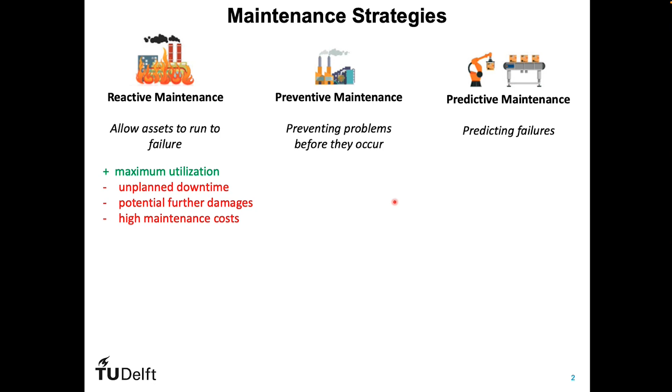For example, with reactive maintenance, the advantage is the maximum utilization of the asset. But we have many unplanned downtime periods, potential further damages, further damage to other assets as a domino effect of one damage, and of course, high maintenance cost. On the other hand, with preventive maintenance, we have less unplanned downtime, we have increased planned downtime, and we are also doing maintenance of seemingly perfect assets. So we are wasting some remaining useful life of these assets.

Last but not least, we have predictive maintenance, since we are predicting failures, and the main advantage is that we have a holistic view of the asset health. And the main idea is to take the right decision at the right moment. Of course, there is some complexity in that kind of strategy. But our role as academics, as engineers, is somehow to reduce this complexity, to make it easier for people to use this predictive maintenance strategy and implement it in real case studies, in the industry.

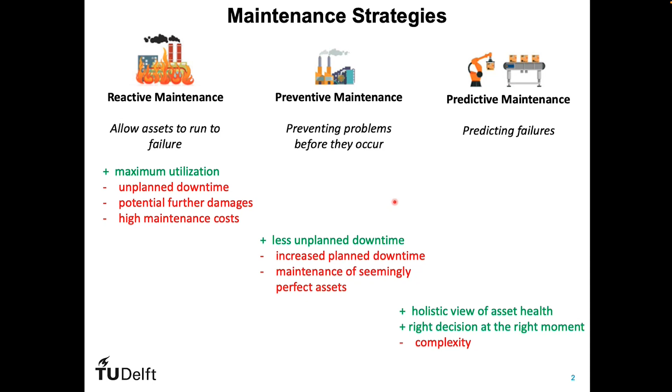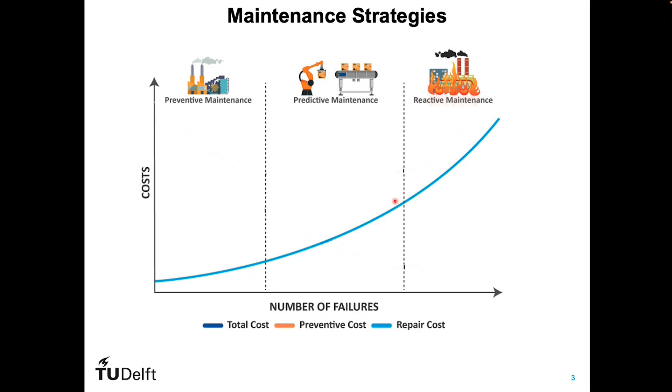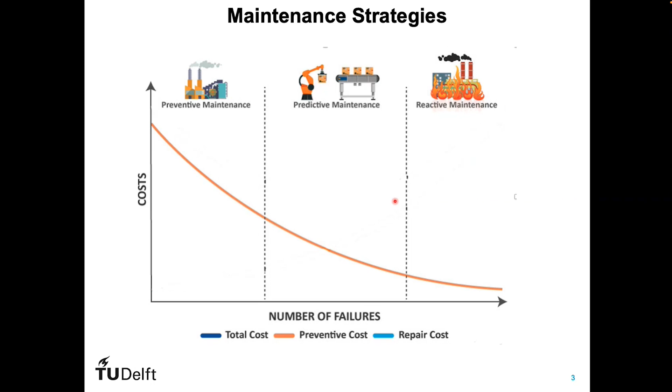So let's discuss a bit about the cost. If we discuss the repair cost, of course, in preventive maintenance the repair cost is really low, and in reactive maintenance the repair cost is really high. On the other hand, the preventive cost is totally different. The preventive cost in preventive maintenance is really high, and in reactive maintenance it is really low. So as you can understand, since we would like to take decisions towards minimizing the cost, the optimum cost falls into the category of predictive maintenance.

So in terms of cost, of course, predictive maintenance is the right decision, but also in terms of reliability. For me, okay, I know that it could be fun sometimes to not really know what the future will bring, or what's going to happen. But in my opinion, in such cases, that's not true. So we need to know. We also have the tools to make decisions about the future.

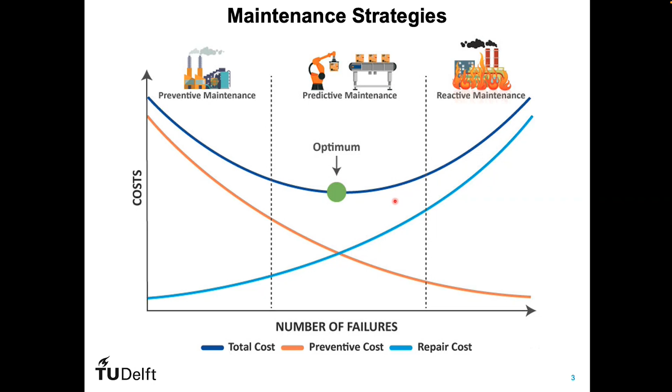And let's move on now to the predictive maintenance strategy, because based on all the aforementioned, we understood that this is the strategy that we have to follow for the maintenance planning. Predictive maintenance is a maintenance strategy that uses data and machine learning algorithms to predict when an asset will fail, so to predict the remaining useful life of an asset, so maintenance can be performed before the failure occurs.

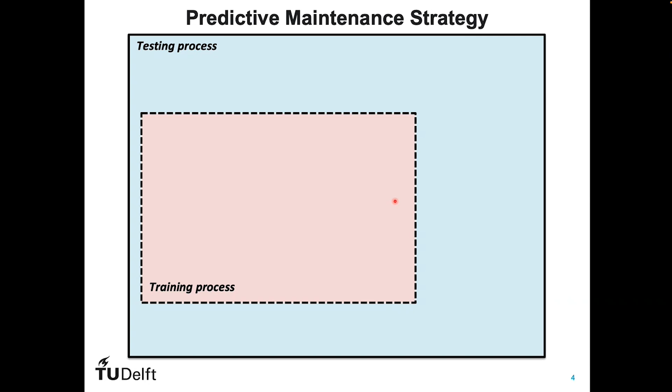Of course, this strategy involves collecting data from the assets and other sources, analyzing the data using machine learning algorithms, and using the results to make maintenance decisions. This strategy mainly consists of two processes, the training process and the testing process. In the training process, we gather all the available information that we have about this asset, some training data. We also have to choose how we will model the degradation process of this asset. And the outcome is to estimate some parameters.

Then, going to the testing process, we have our testing asset. We are extracting some data from this asset. We are doing some kind of feature extraction. We develop some monitoring data, some health indicators, and afterwards, using these health indicators and the estimated parameters, we are able to do some diagnosis. With the term diagnosis, I mean to predict the current damage state of the asset, and later on to move towards prognostics. And having prognostics, we can go towards decision making.

So as you can understand, prognostics is the essential element of this predictive maintenance strategy, since it's the only element that provides the needed information about the future. It's the only element that can quantify the remaining useful life. Of course, diagnostics is important, since via diagnostics we are able to know the current damage state, but the insight towards time, which is a really important parameter for a maintenance strategy, comes only via prognostics.

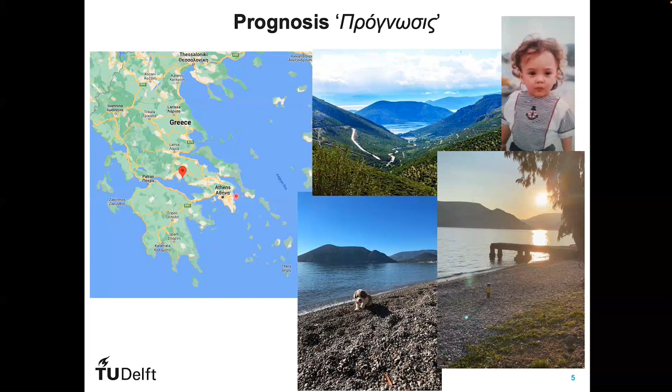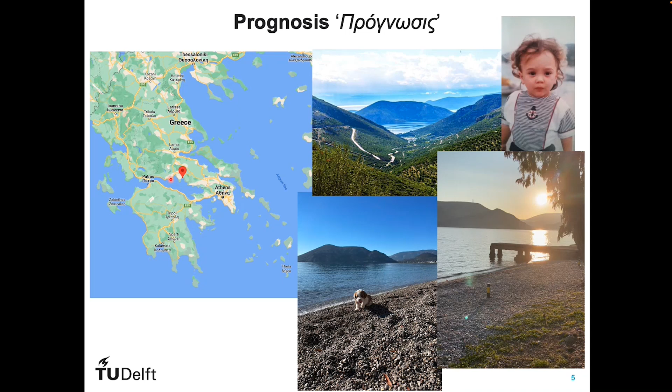So let's now talk a bit more about prognostics. Let's go back into history. At least the first step will not be really back into history. And this is me. As you have understood, I'm Greek. I grew up in a place called Aspra Spitia, which means in English white houses. This place is over here, really close to Athens, let's say. It was quite common every weekend or every second weekend to have walks with my parents and visit other places close by. One place really close to my hometown is Delphi.

I don't know if you are familiar with this place, but between the 7th and the 4th century BC, people from all over the known world would visit the temple of Apollo in Delphi to consult Pythia for personal matters. Pythia was the name of the high priestess of the temple of Apollo. Pythia was widely credited for her prophecies, under divine possession by Apollo. And her oracle powers appeared to be associated with vapors, probably ethylene gas.

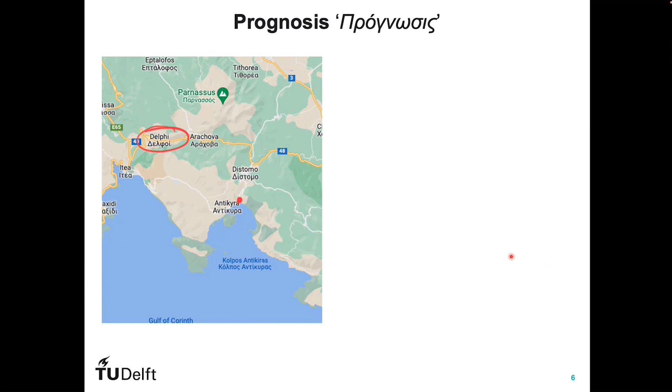As you can see, this place is really close to my hometown, so I used to go there quite often. And as a child, I was always really interested in how this was possible. How is it possible to make predictions about the future? How is it possible to know the future? And this is my first way of learning and thinking about prognostics. But let's go now back into science.

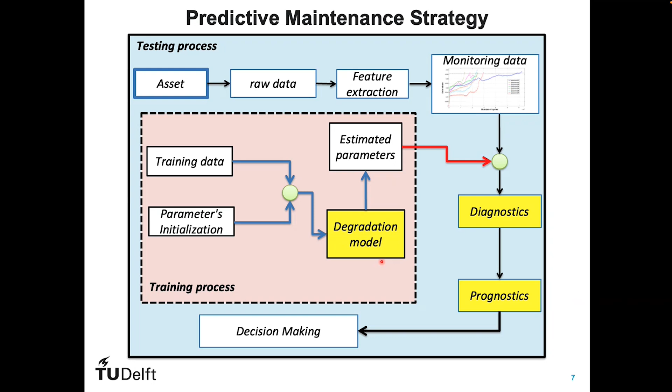In the next slides, I'm going to discuss a bit more the selected degradation model that I'm using in most of my case studies, and I will also define the meaning of diagnostics and the meaning of prognostics. In most of the case studies, I'm using Markov models. A Markov model is a stochastic model that describes a sequence of possible events. Markov models are mostly called state space models and can be characterized as clustering models. The idea is to define some damage states. In this illustration, we have 4 damage states.

And the idea is to model the degradation process of this asset. In order to model this degradation process, we can model it via some sojourn times for each damage state, so to know how many time units the asset will remain in one damage state, and also create connections with the next damage states. The sojourn times can be geometric or exponential, depending on whether we have a discrete domain or a continuous domain. But if we would like to extend that, we can use semi-Markov models.

With semi-Markov models, we can model the sojourn time with any kind of distribution, parametric, non-parametric. We're also going to move into hidden semi-Markov models. Hidden, because the observations that we are extracting from this asset are not directly connected with the damage state. For example, imagine that we have an engineering system and we are extracting different kinds of data from this system: acceleration data, thermal data, any kind of data. Of course, this data includes some information about the damage state, but this information is not direct, that having these measurements means that we have this damage. So we need to model this connection, this hidden connection. And this hidden connection with hidden semi-Markov models can be modeled via these emission matrices, these beta parameters.

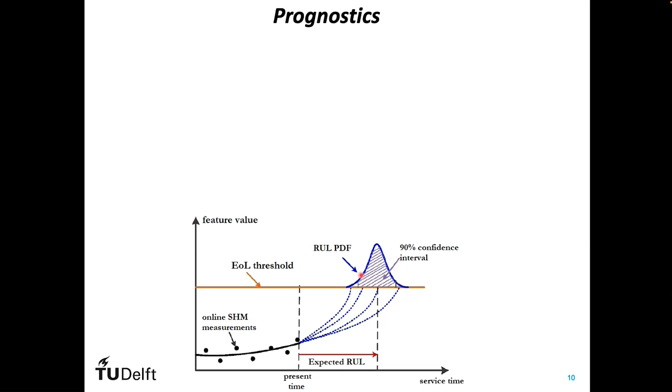And let's also give a mathematical definition of the reliability. So what is the reliability? It's the probability that the asset will be alive at the time point t, conditional to the available data that I have till that moment, which is the time point tp, given the fact that my system hasn't failed yet, and given the estimated parameters that we have already calculated in the training process.

So let's discuss a bit more about the prognostics. What we can have as an output in terms of prognostics: let's assume that we start our experiment, we have our asset, and after 155 hours, using all the available data and the estimated parameters, we can predict the remaining useful life. And as I have already mentioned, the remaining useful life is a random variable, so we can predict the mean value. This red line is the mean value of the remaining useful life, and also some confidence intervals. Here we have, let's say, the 90% confidence intervals.

And later on, when the system finally fails, and this asset fails after 210 hours, only at that moment will we be able to plot the actual RUL. And this line consists of 2 points. What this line tells us is that after 210 hours, the remaining useful life of this asset is 0. And of course, at the 0 time point, the remaining useful life is 210 hours. But once again, this line is known only in the end.

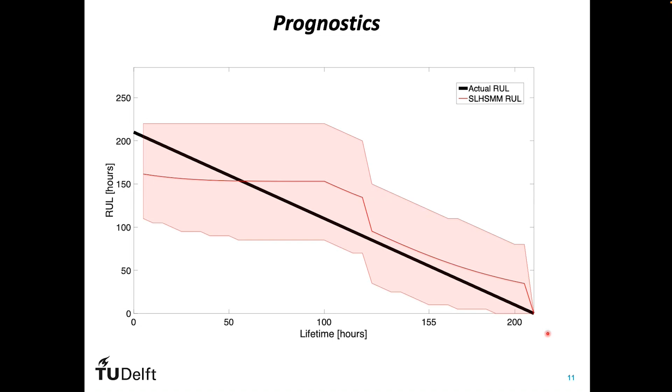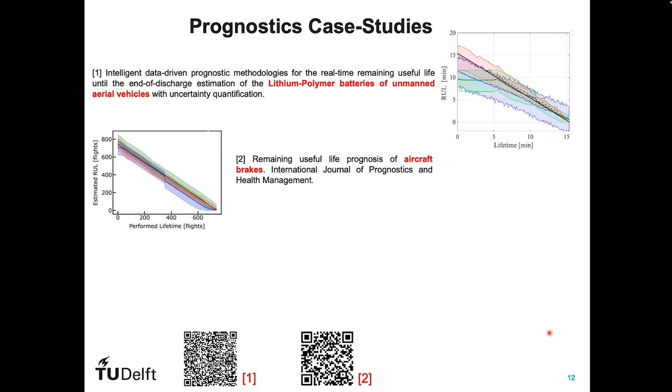So we have used these kinds of methodologies for many different case studies, let's say for lithium polymer batteries, for unmanned aerial vehicles, also for aircraft brakes in collaboration with KLM. I have also used that for compressors. But now let's move towards one specific case study, and this case study is about prognostics of composites. As you probably know, high-performance composite materials like carbon fiber reinforced polymers are used in primary structures of aircraft nowadays, like the Airbus A350 and the Boeing Dreamliner.

So, of course, there are many advantages regarding this kind of materials. First, these materials are lightweighted. Composite materials can be lighter than traditional kind of materials.

Also, they have high strength to weight ratios. They have really high durability, so they're often highly resistant to corrosion and damage. Of course, we have flexibility in terms of design and tailored properties, such as high electrical conductivity and thermal resistance.

But of course, there are some disadvantages. The heterogeneity that exists in composite materials, the anisotropy, the interfacial effects of these two materials, and the complex manufacturing process make these materials a really complex engineering system. To be honest, based on my experience till now, composites for me are the most complex engineering system that I have faced.

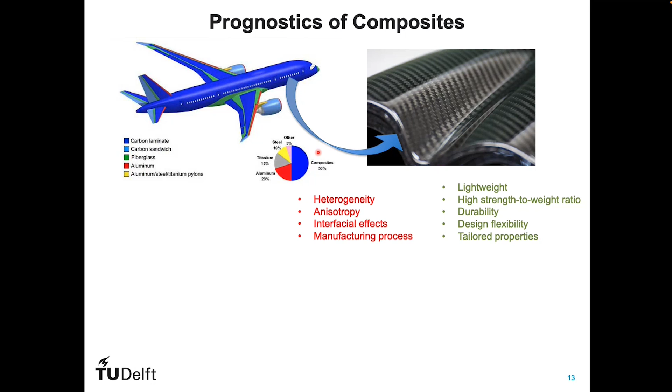So I tried to do prognosis for composites, and how we did that - we just took some rectangular composite specimens with this kind of dimension.

And we had some loading conditions, like fatigue loading conditions. This is just the loading conditions that we applied. And we had 8 specimens, 8 CFRP open hole specimens.

These specimens are manufactured exactly the same way, from the same material. The operational conditions were exactly the same, so same loading conditions. But still, if you observe the lifetime of these 8 specimens, we have a high variance.

Specimen 1 failed after 22 hours, specimen 2 after 16 hours. If we manage to identify the outliers of the training, I think it's specimen 4 that failed after 13.6 hours. And the other outlier is specimen 8 that failed after 30 hours. So we can see a high variance in terms of lifetime.

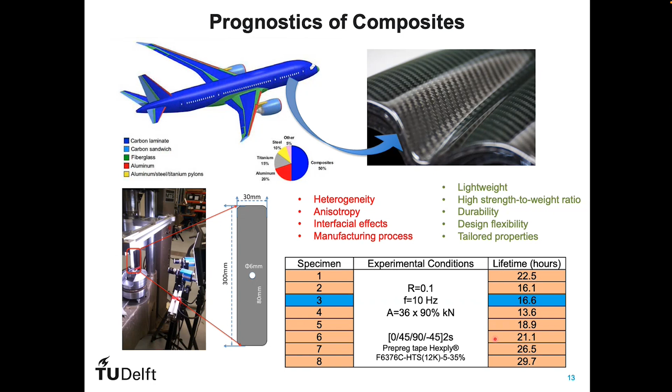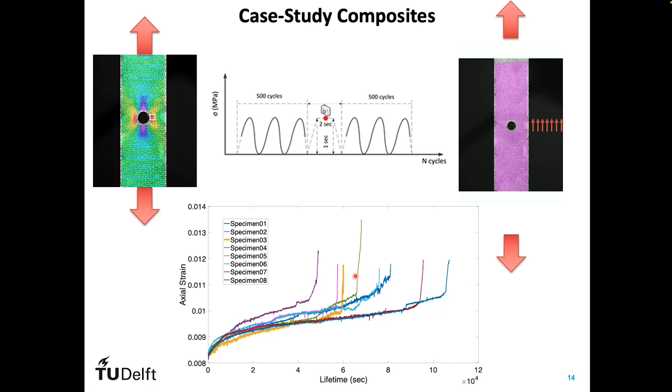But my question is, what is going to happen if we have some unexpected phenomena only during the testing process? The training process has already happened - we have the data, we trained the model - but in our online system, in our online asset, we have some unexpected events.

For composite structures, in terms of aviation, imagine that this unexpected phenomenon could be a bird strike, and we simulate that via online impacts using a gas gun.

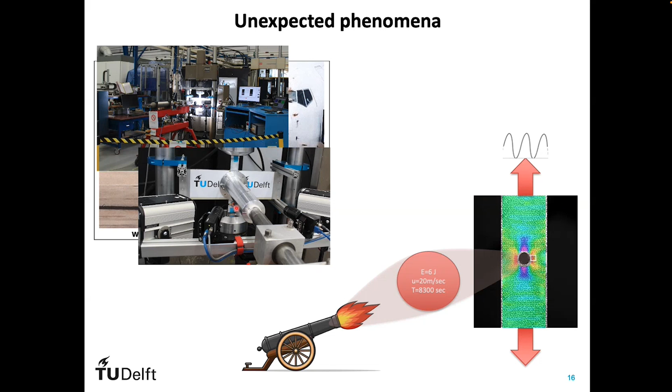So during the fatigue loading, we just took one gas gun and went directly to the composite specimen, and we had some impacts. We can also have unexpected phenomena in terms of the manufacturing process.

To be honest, I didn't do that on purpose, but during the drilling process, the quality wasn't the same. As you can see, the drilling process here has different quality than the training data.

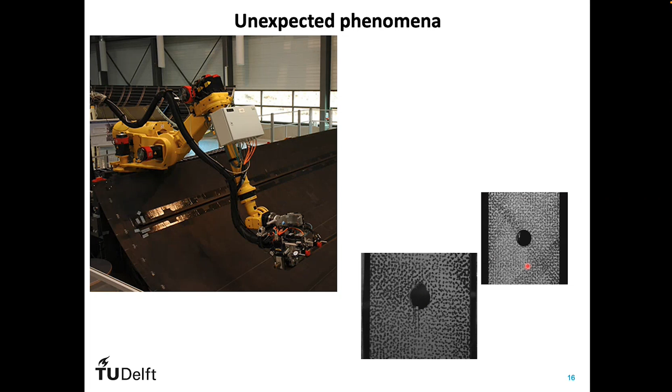And then we did exactly the same feature extraction process. So we have these two new specimens, and these specimens include now some unexpected event. As we can see, the specimen with fatigue and impact failed after 10.5 hours, and the specimen with the manufacturing defect failed after 4.2 hours.

So these are kind of outliers, because in our training process, the minimum lifetime that we observed was just 13 hours.

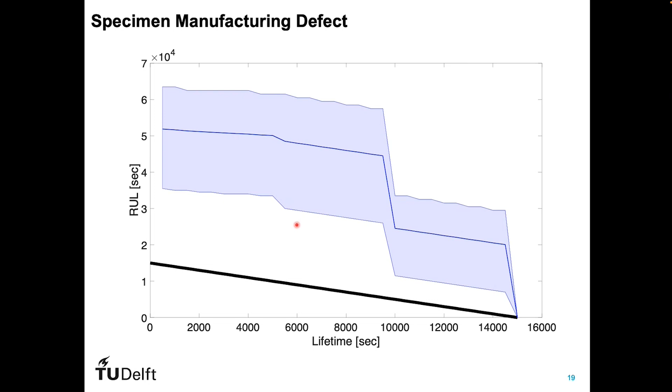And then going back to the manufacturing defect, the results here are even worse. So this is not acceptable at all in terms of reliability and accuracy. So here is the first challenge of prognostics, and the challenge is about data.

But is it possible to have enough data for our training process that can characterize all the different kinds of uncertainties that we are probably going to face? So let's discuss a bit more about the sources of uncertainty.

We have lifetime uncertainties, like past state uncertainties during the manufacturing process—the drilling defect was part of a past state uncertainty. We also have present state uncertainties. Imagine you are using sensors to extract data. The quality of these sensors is not always the same, because the sensors also face fatigue. The quality is different during the lifetime.

And of course, this is the main issue here: the future state uncertainties. We don't know the loading conditions, or all the unexpected events that can happen in the future. And last but not least, we have model uncertainties, since we have chosen a model to model the degradation process, and we also have uncertainty in our diagnostic and prognostic tools.

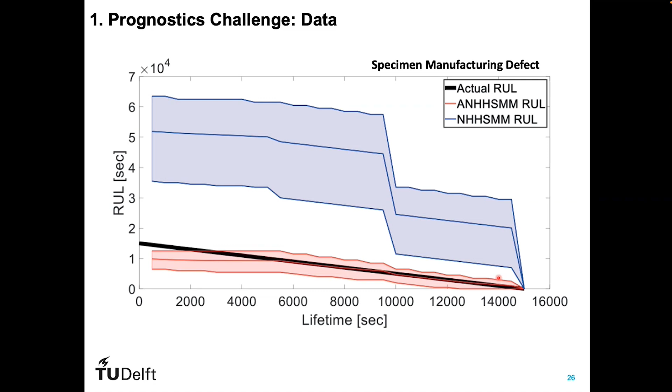Let's think a bit. As we have already discussed, only in the end, only when our engineering asset has failed, are we able to sketch this actual remaining useful life line. But let's assume that this line has been sketched in the case that our engineering system's operational conditions were perfect, the ideal ones. So in such a case, the remaining useful life could be 220 hours.

But what if the operational conditions were a bit different? So after 50 hours, our asset faced some really harsh environmental conditions. That could mean this actual line could be different. Or what if in the future, after 100 hours, our asset is again in really good operational conditions? As you can understand, the actual remaining useful life line is not always linear, it's not always the same, it's dynamic.